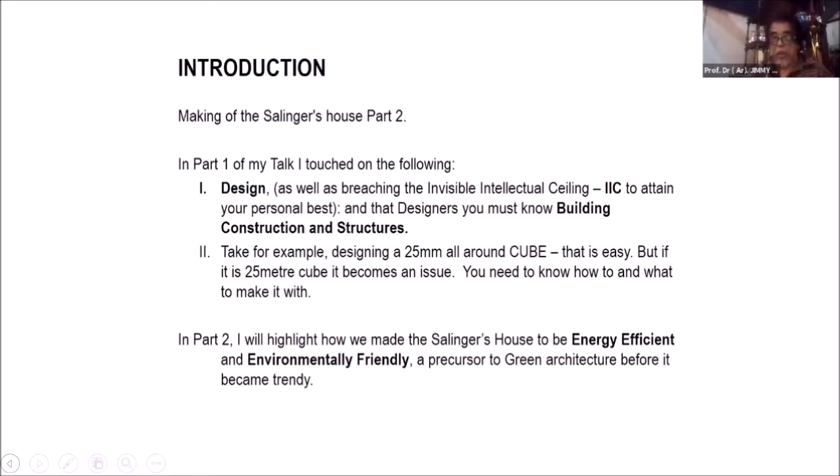Energy efficient and environmentally friendly were not the norm back in the 1990s. In fact, it was the precursor to green architecture. And green architecture was at that time not trendy or in vogue.

Now, this is important because the jury in selecting the Salinger's house commented that it was an example of excellent architecture, which is contemporary, yet not alienated from its specific cultural context. So, in other words, whatever that we design has to be relevant, contemporary, but yet specifically related to our cultural context. And that is something we must not lose sight of.

In today's world, too many of our designers are Googling ideas. And ideas that you get from the internet are not worth anything. That's my opinion. Okay? Then the other thing which the juries commented was the high technology and energy depleting services need not play an issue if we are able to be creative and employ vernacular architecture to create something that's suitable for our contemporary lifestyle. So we take these two comments by the jury to be very, very important.

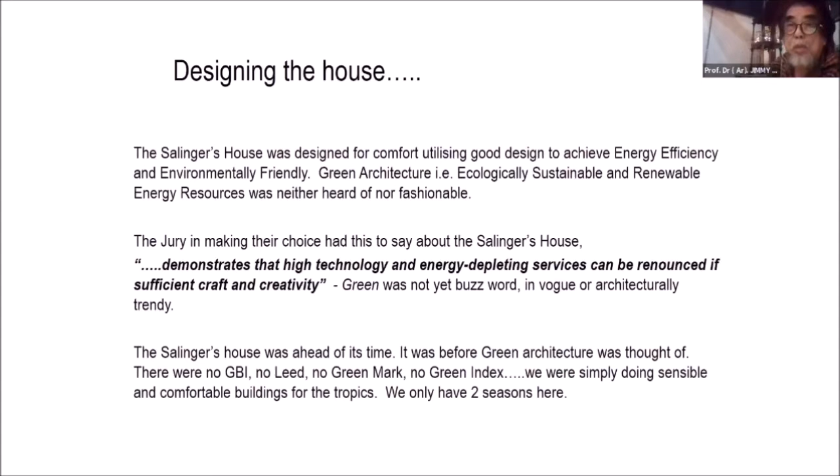What baffles me, this green building index, GBI, you have to use all sorts of expensive M&E equipment before you get points. And it's only when you've got all these points that they give you a gold award or platinum award and all that. It's rubbish. Let's not be conned. GBI, as far as I'm concerned, is another way of imperial recolonization. Okay, thank you.

Now, when we talk about energy efficiency and environmental friendly, what are we talking about? We are talking about looking at a lot of things. The site is the first thing that you have to look at. And what do you do when you go to the site? You've got to look at the vegetation. You've got to look at the land formation. You look at the lay of the site. You look at the fall. Look at the surface drainage. Telltale signs of where water falls, flows.

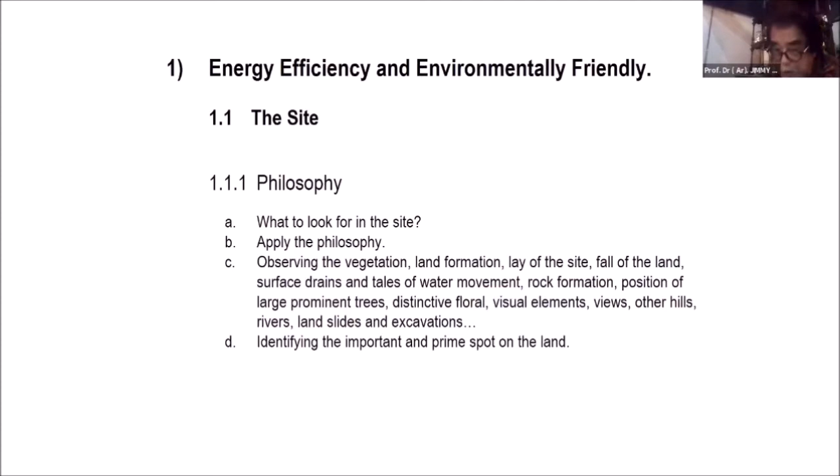After a big rain, you look at the rock formation, positions of large prominent trees, distinctive flora, visual elements, views, hills, rivers, any land failures, landslides, or excavation. These are the sort of things you've got to look at. And once you have identified the land, you then select the best location to site your house. And from that position, you've got to understand the orientation, where the north is, where the views are, where the prevailing winds are. Now, these are the sort of elements that you need to look at in order to create energy efficient design.

So the way it flows, water disperses. That's very important. That's why if you do not touch the land, you'll never get any flooding. But a lot of engineers and architects, first thing they do, cut the hill, fill in the valley. Once you do that, you've stuffed your whole environment. And you're going to give yourself a lot of trouble, and your project costs would go up. Totally non-sustainable.

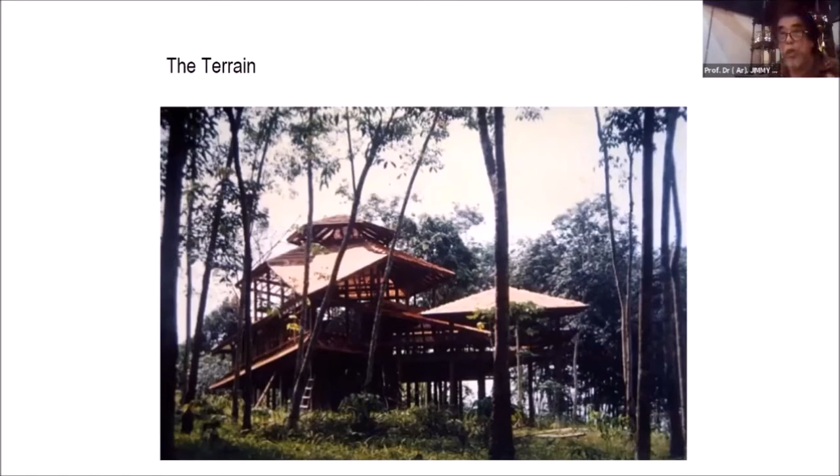Then we look at other things that contribute to the environmental friendliness. The selection of the material you're going to use for your building. The placement of your building on site. The orientation, the aspects. What are the trees you want to preserve? What are the trees you need to remove? And most important, what type of construction technique you're going to use to minimize the environmental impact on nature.

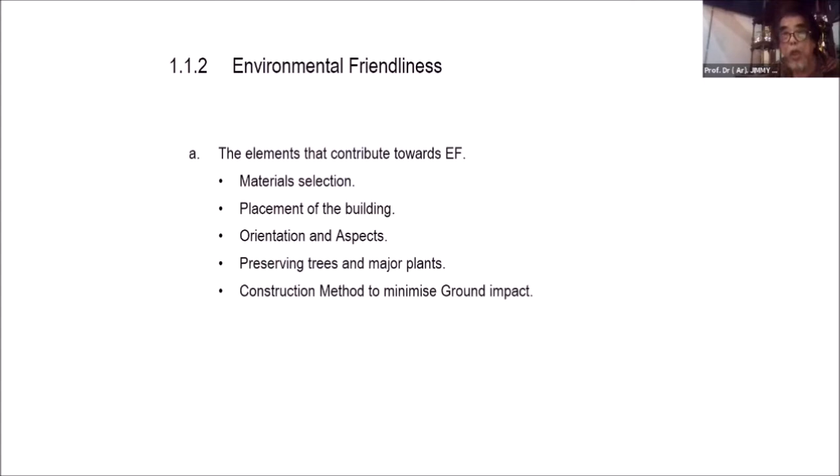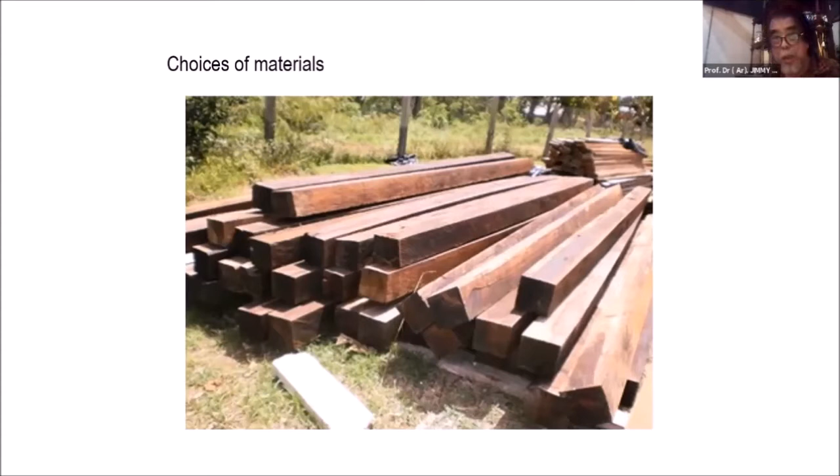Many designers, many architects, many engineers are totally oblivious and insensitive to the environment. You know, you've got to look after the environment, and the environment will look after you. Remember that. So we use timber. We get the sizes of the timber that are closest to the sizes that we need. And there's no wastage.

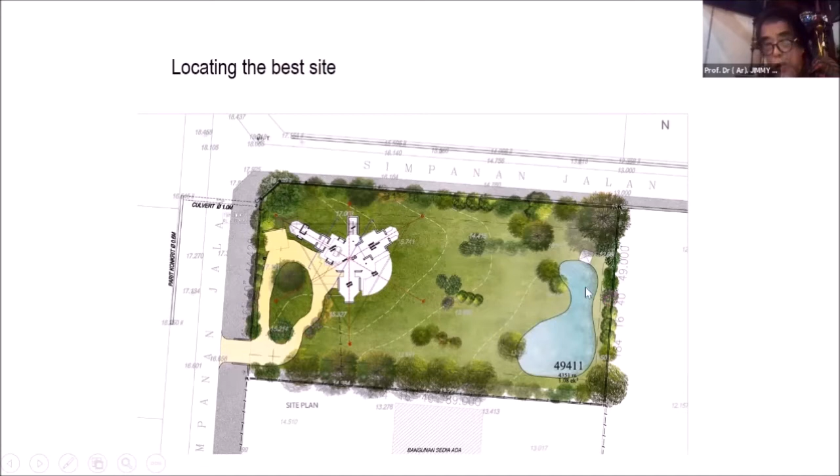And here you can see the tree. See, the tree is here, and that's where the house is sitting on the high land, and the land is falling away, right down to the bottom, where we had created a pond so that it can catch all the rainwater, surface water that will fall off, and it provides something pretty.

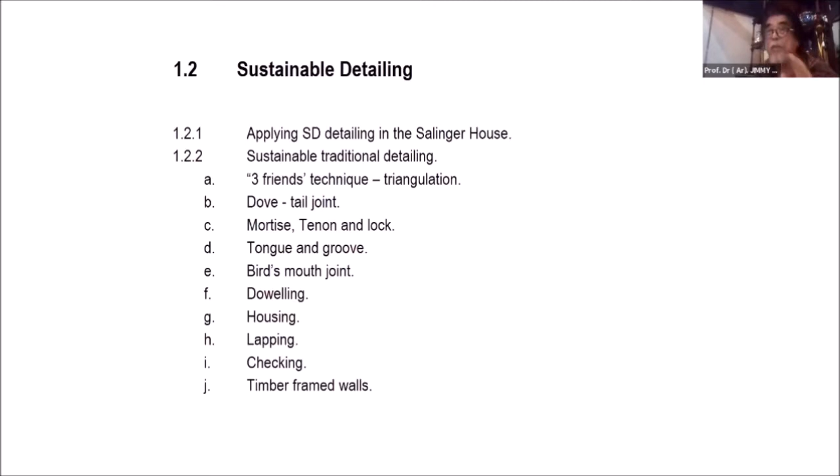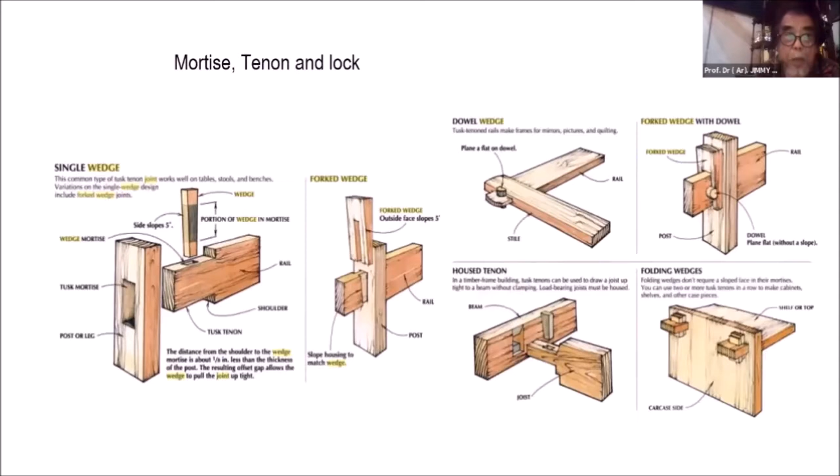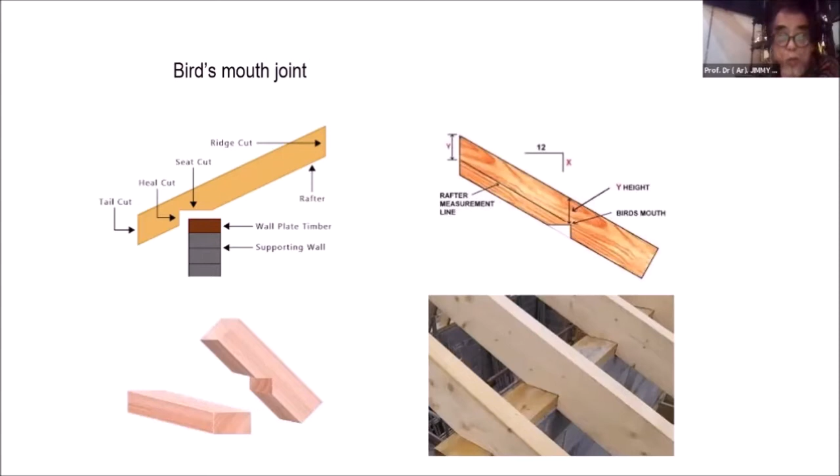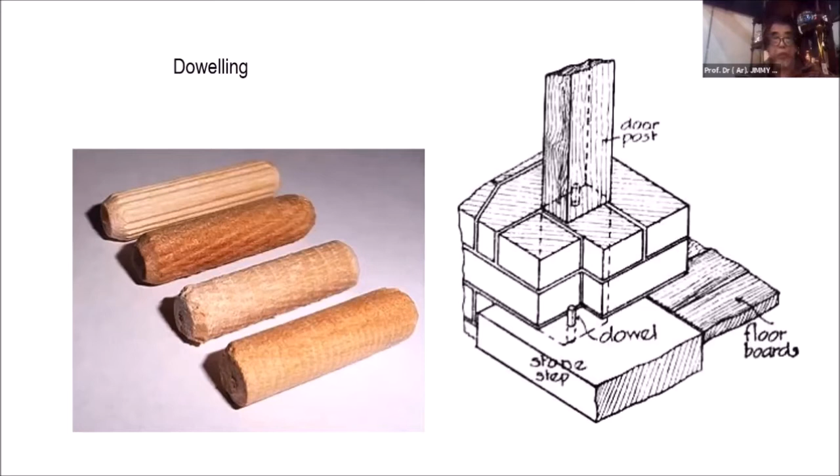Bird's mouth joint for the rafters and for the ridge of the roof, so that the roof would not get blown away. Doweling. At the base of every column, every vertical component of a building, you must have a dowel. The dowel is to stop the thing from moving. Housing is when you put a piece of wood into another piece to provide stability, and that's very important, so that your building does not become wonky.

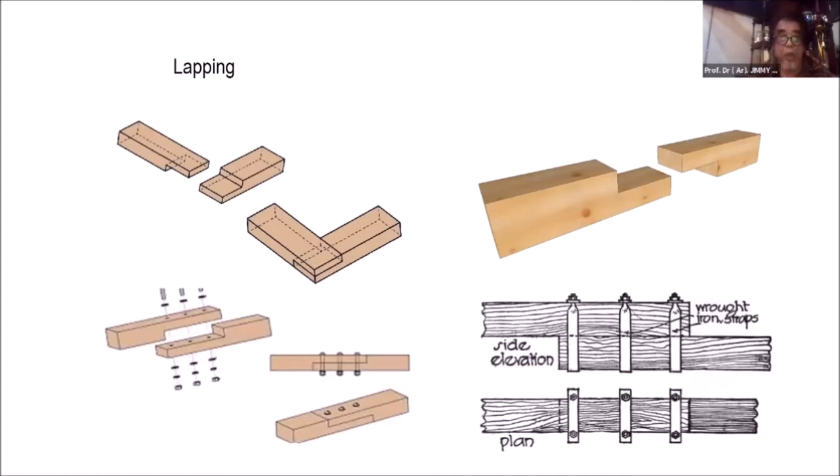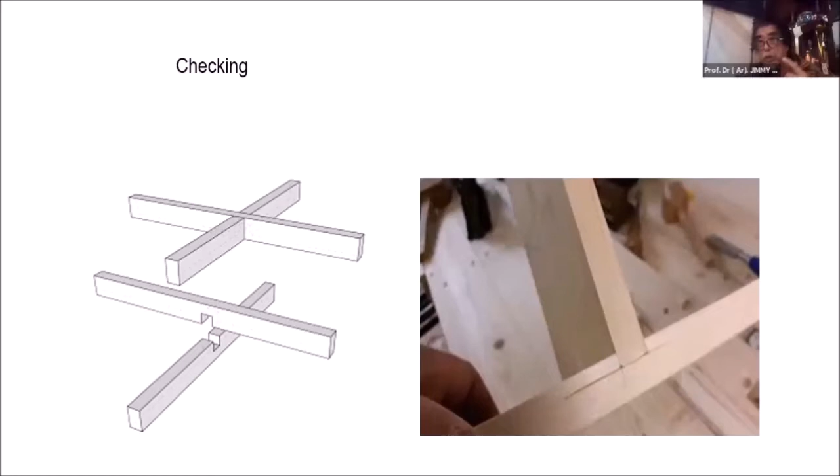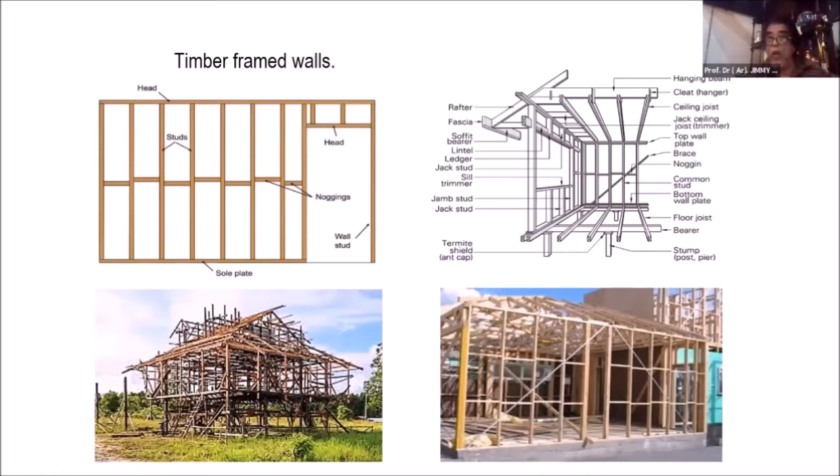Lapping. Sometimes timber is a bit short and you need to extend it a little bit, so you need to lap. In overlapping, you've got to ensure the continuity of its strength. Then you talk about checking. When you do a timber frame wall, all your junctions of timber must be checked into the other piece of wood. So this is the timber framing that shows you the noggings, the studs, bracing, the lintels, ceiling joists, ceiling hangers, the floor joists, floor bearers, and so forth.

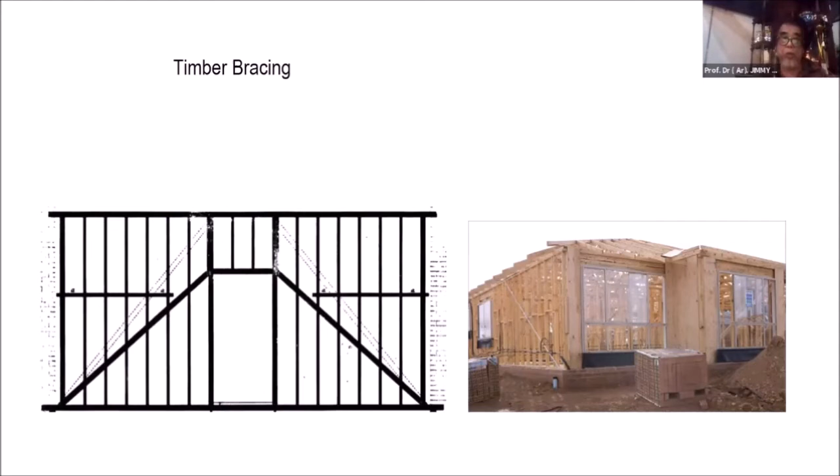Then the important one, very, very important aspect in creating stability is you must have bracings. Without bracing, your wall will collapse, and that's very important. Now, to provide comfort in the tropics is to keep the sun out and to have a lot of openings for wind to come through.

Now, in keeping the sun out, you have large roofs, and that also keeps the rain out. But then you need the walls so that when it rains, you don't get wet. But then when it stops raining, it gets hot, and you don't want the walls. So how do you overcome it?

So there are lots of things we have to look at in terms of overhanging eaves, sun shading, having lots of ventilation through floor, slats, timber seats, soffits, walls at low level, high level. You have high ceilings to induce convection air movement and cross ventilation, placements of walls and openings in strategic positions to induce air movement, the venturi movement of air and so forth.

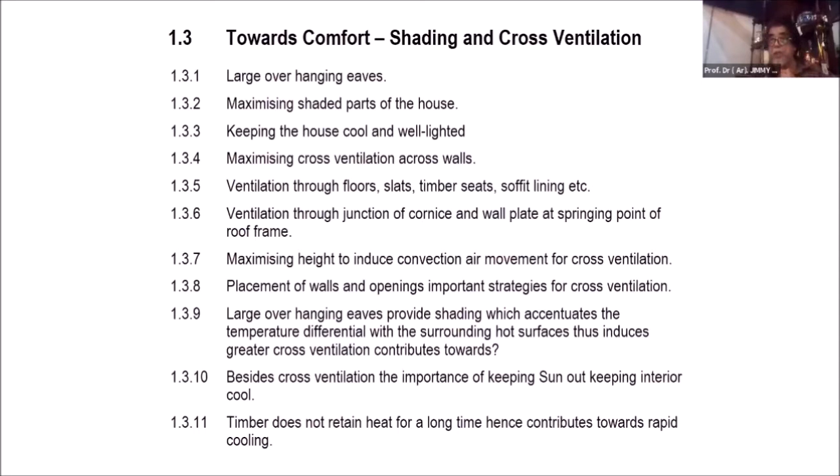But the most important thing is to keep the sun out, keep the walls cool. When the walls do not get sunlight, the interior does not get any heat. The reason why we use timber is because timber is a good material. It absorbs heat and it also loses heat very fast. So you don't have to worry about timber being hot in the evening.

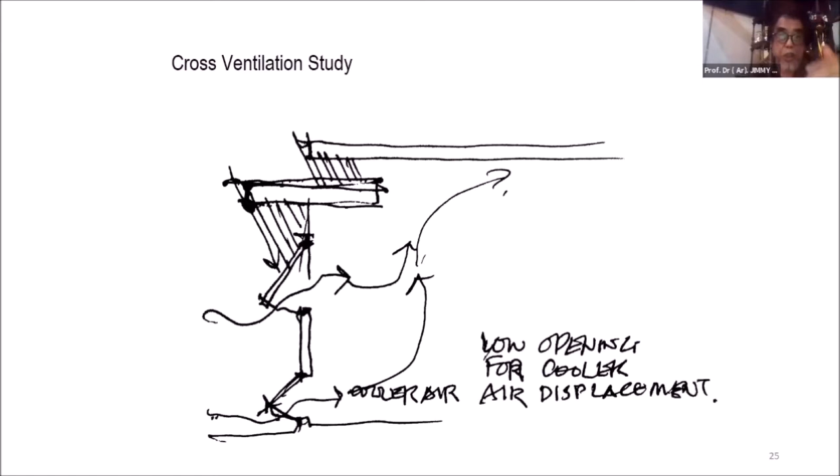And also where the rafters are sitting on the wall plate, there are gaps in between. These gaps are very important because they allow cool air from the outside to come in, and they push the hot air that's formed underneath the roof tiles away. And the same thing here, you see.

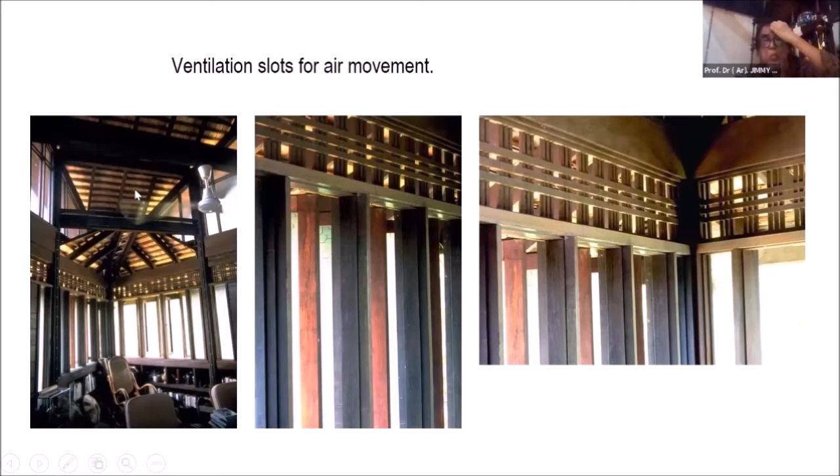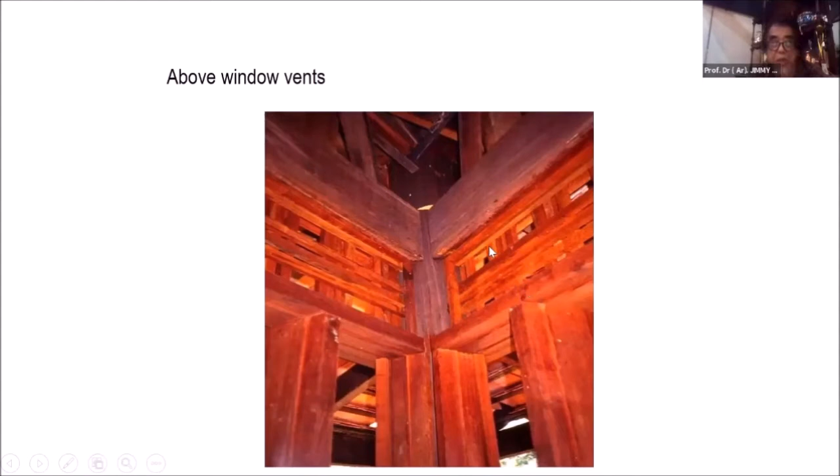So these are the sort of things: the more apertures you can have in your building, the cooler your building will become. Look at all this opening. And these are slats, timber slats that are used all the time. If you maximize your shading, look at it, it's all shaded in shadows. Look underneath the shadows.

And the seats are all slatted so that hot air may not build up and allows cool air to go through. Here you see in detail all the slots and so forth. And providing slats like this and slots allows water to drain off very fast.

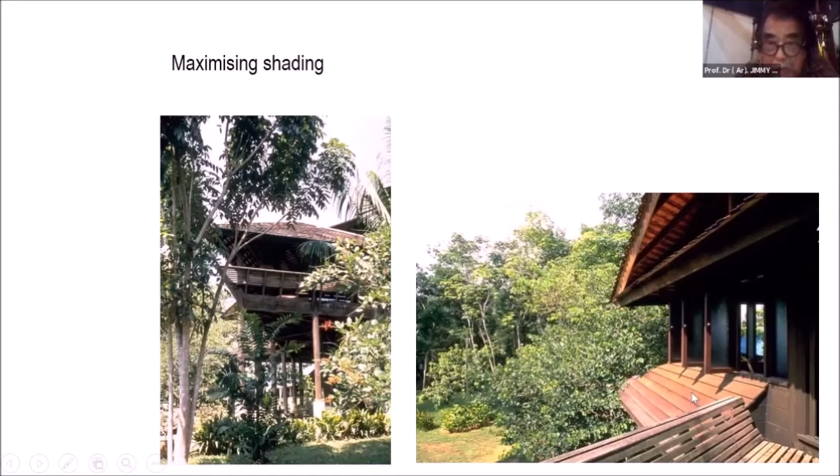Oh, what happened? So there you are.

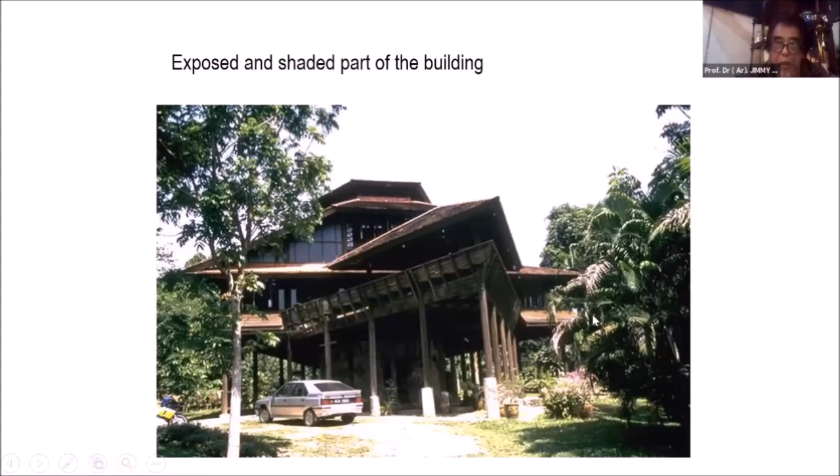There are lots of shaded spaces and what have you underneath the building and so on. And where the lighted areas are, that's where it gets hot. So you get the hot and the cool, and that helps ventilation.

Now, the other very important thing: we have talked about construction. Next thing is your structural system. You see, a building must have a proper structural system, just as a person has a skeletal frame. So in this case, the structural system is the triangulated grid system. The triangular grid came around because of the client's requirements.

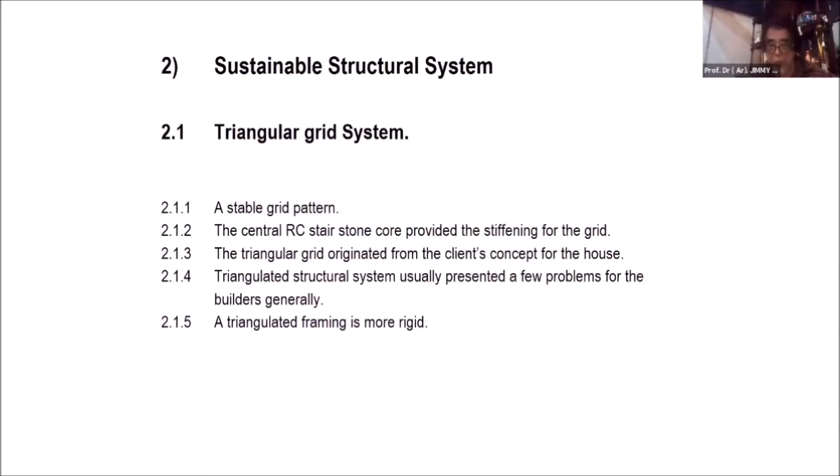In last week's lecture, I explained the concept of how the two triangles came about. So we use the triangle as a base for deriving the grid system. And a triangulated frame is always very, very stable. However, it may be a little bit difficult for some builders to build.

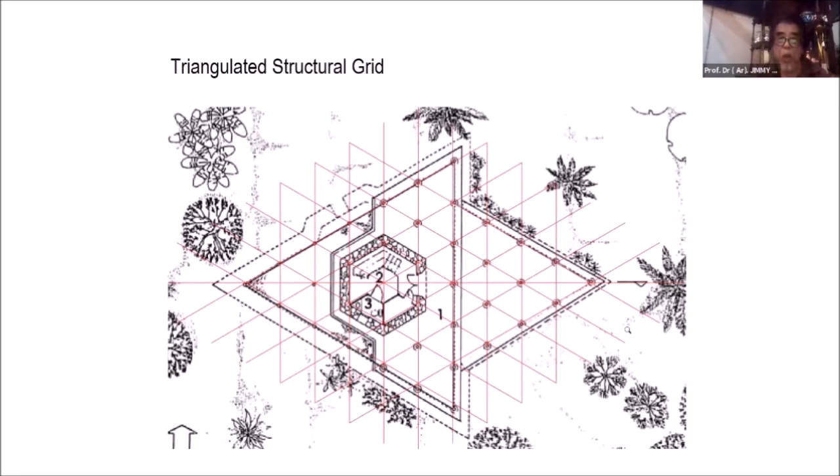Now, in timber construction, the next most important thing is the framing. The different systems of the post and beam framing. You've got the timber frame walls. You have the roof framing, floor framing. The word framing describes putting together different components. You frame them, and that's what it is.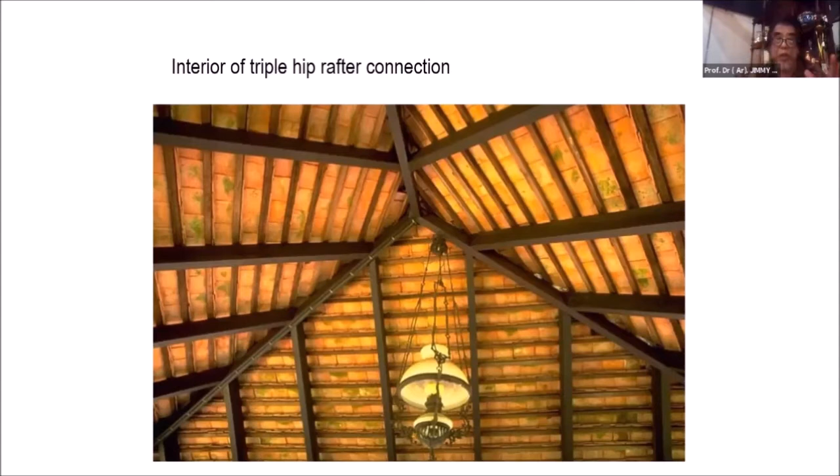You see, these are the main hip rafters of the roof, triangular shape, and these are the rafters that come in. See, the way they are laid, they are neatly laid so that the whole thing looks pretty. It looks like it's part of a leaf.

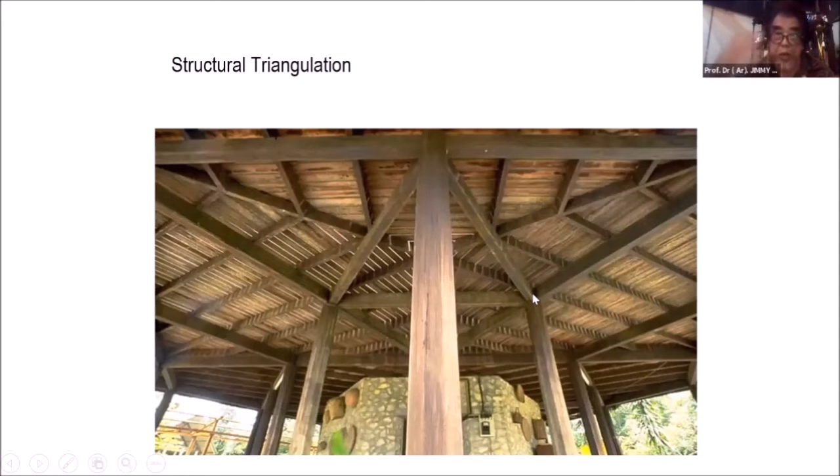And because it has a pattern, this junction was created using the traditional craftsmen's jointing, using a dovetail locking device. And by providing this type of detailing, what happened here? It allows dismantling because everything is locked into place like Meccano.

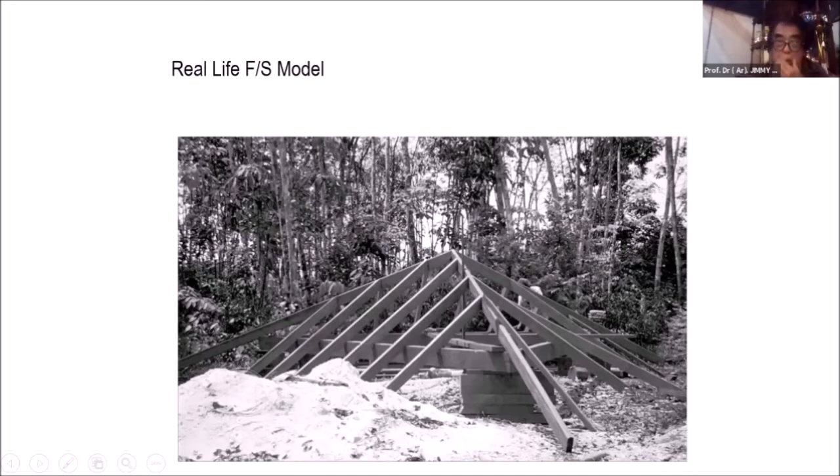See, that's a framing of a roof. This is a full-scale real-life model they make at the site. They test everything. They make sure that this connection works and all this other works, and that the bird's mouth here works. Then after they know that it works, they produce the real thing and they put it up.

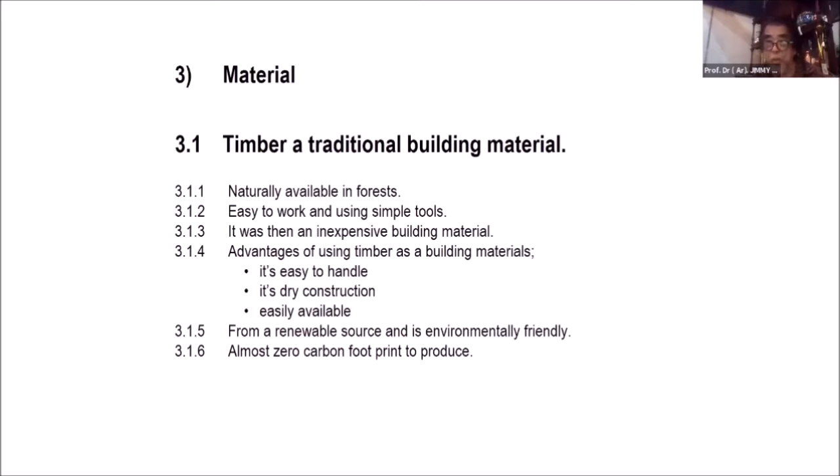Now, timber is a fascinating material. We have them in our forests, lots of them. And you can work with it easily. It's a dry material, it's easy to handle, and you can use very simple tools. So in those days, the type of timber we used was very inexpensive, I think something like about 150 to 180 ringgit a ton. Now that's very good. And the marvelous thing in terms of environmental friendliness and energy conservation, it's almost zero carbon footprint for timber to be produced.

It's important that when we do something like this project, the carpenter, which in this case is Adam, he went into the forest to look for trees to cut himself. And he only selected trees that are not too big so that there's no wastage. And that's very important.

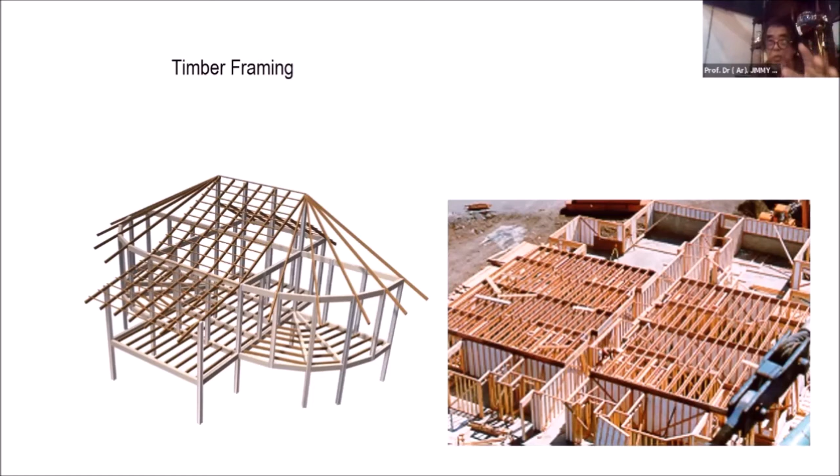Now, the trees were all ecologically harvested, as I explained. He personally selected them. He cut them. They are from the forest near where he lived in Kelantan, near the Siamese border. And these trees were all cut, dressed, transported down to the site in KL, and then left there to be air dried.

Now, none of our wood was kiln dried. Kiln drying wood for the tropics is wasteful because the average working moisture content of wood in our place is about 20%. Now, when you kiln dry timber, the kiln brings the moisture content down to around 8% because all these machines were designed for the temperate climate, and they do only temperate wood, softwood, and their moisture content is 8%.

So you kiln dry in the tropics at 8%. The moment it comes out of the kiln, within 24 hours, the 8% moisture content has risen up to 20%. So it's an exercise in futility. So what we did in this project is it was left to air dry under a shaded place. That's the best way.

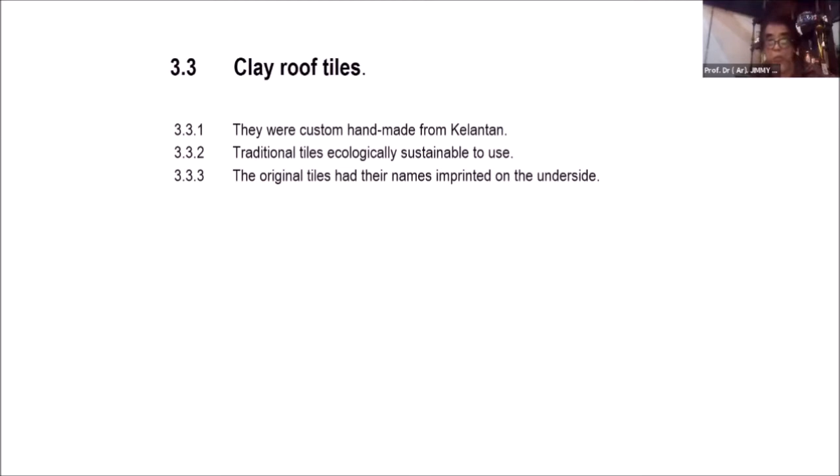You see, we need tiles that will absorb a certain amount of moisture, because when the tile has a certain amount of moisture content in it, it also acts as a repellent for rainwater. Now, these tiles were custom made for the Salingers, and it had the name in Arabic underneath somewhere.

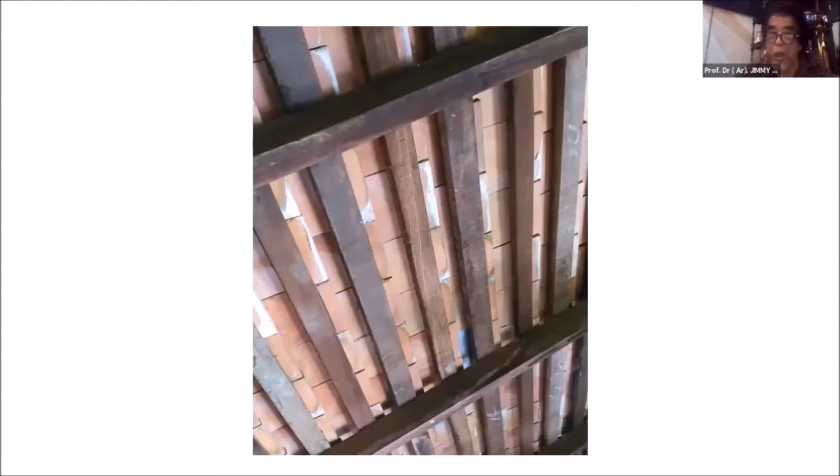This is a close view of the type of roofing. This is another close view of it. And this is the view of the underside. See, these tiles were all laid on these battens. So the tile is slid in this way with a little bend at the end of the tile so that it hooks onto here.

Now it's very clever, because if you have to replace a tile which has broken, all you need to do is remove the broken tile, you pull it out, and then you slide in a new piece.

So you see, the replacement is a very easy thing. So if this is not sustainable, ecologically friendly, and energy conservation, what is it? So all these were the sort of things that we had introduced into the Salinger's house.

Another view of the underside of the roof, no insulation, because in the tropics you do not need insulation, because when you put on your insulation, those wool, whatever you call them, fiberglass wool, it's like saying that in the tropics, to stay cool, you should put on a fur coat.

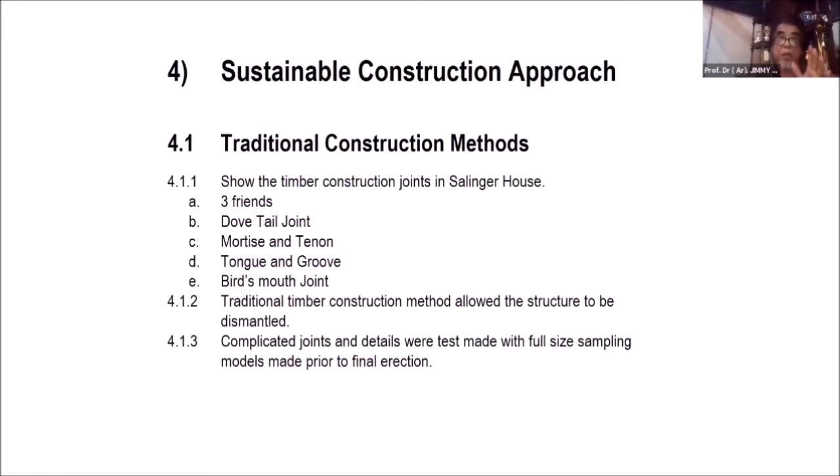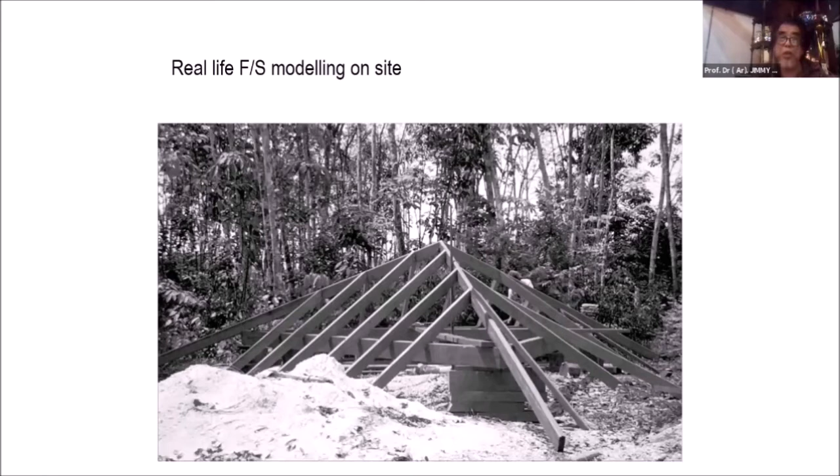Then we had an engineer who did not understand, and he said all the joints had to be done with metal gusset plates. But then when we met this contractor, Pak Adam, he said, no, we don't need to use steel. They will use the traditional method of cutting and so forth, because in that way it allows the building to be dismantled.

So when he was shown the picture of the plan, the triangular plan, the friend who showed it to him said, hey, this is not the usual Malay house. So what are you going to do? He looked at it. After a while, he said, well, if they can draw it, I can build it. Now, that's gumption for you. He's a never say die guy, and I like that attitude. He's unfazed by challenges, the spirit of determination. He's cool.

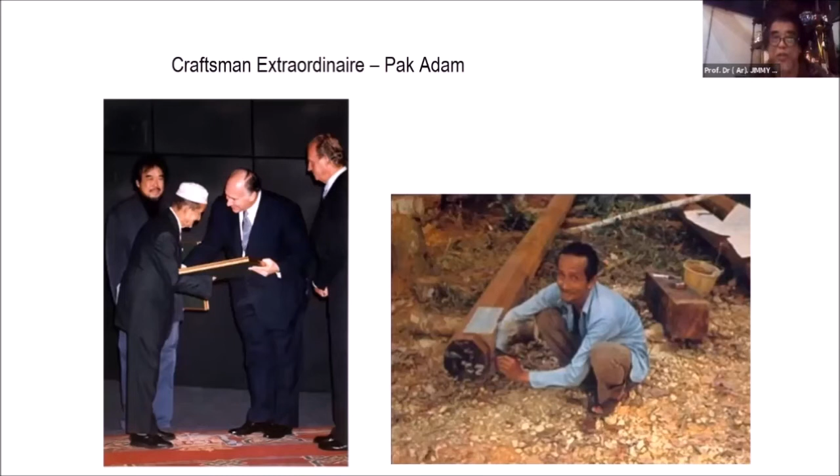And from his part of the prize money, I was told he came back with that money, bought little gold pendants and gave them to all his grandchildren. So every one of them got a little thing to remember their grandfather, this great man's achievement. Wonderful.

Now, when Pak Adam provided the alternative method of jointing the wood, we jumped at it. So he was able to do all this because it allowed for dismantling. And this guy, he is a carpenter, he's a rice planter, and he's also a farmer. So he has a cyclic life of 3 different activities.

And I think he juggles it so that he doesn't work like what we do, 9 to 5 on one job. His one day could be over 3 jobs. This is not unlike some of the Indian farmers I met many years ago when I went to Kerala.

They have this little 1 acre plot of land. He's a farmer because he plants a lot of vegetables, fruits, and what have you. Then he has a cow.

When he gets up in the morning, he works as a farmer. He tends his farm, then gets all the produce of vegetables, fruits, or whatever it is. He takes it down to the market in Kuala. He sells it, and at about 10 o'clock he finishes in the market.

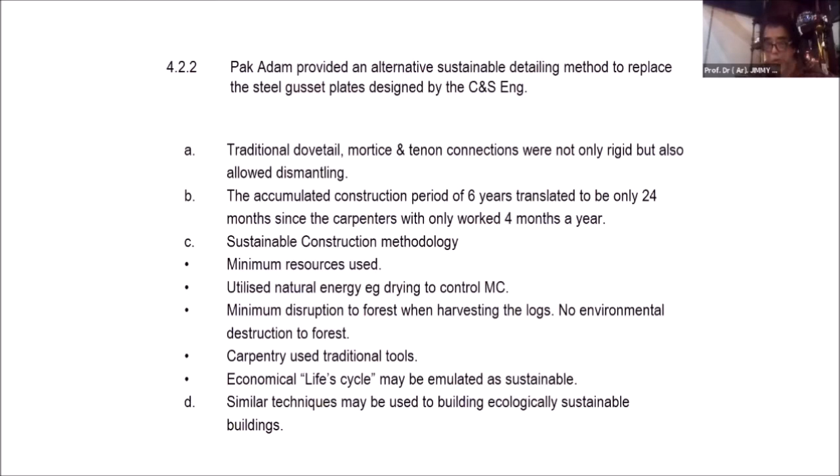Now, having done this project and seen how it was done at close quarters, I think if we have more people like the carpenter Pak Adam, similar techniques may be used for the construction of a lot of buildings. And the tools they use are very simple.

I managed to get a couple of pictures of what the traditional hand saw looked like—very simple. Then they have wood planers, hammers, drills for drilling holes, plumb tools, all sorts of things. Chisels and axes for cutting wood and shaping big wood. It's all there—simple, straight hand tools.

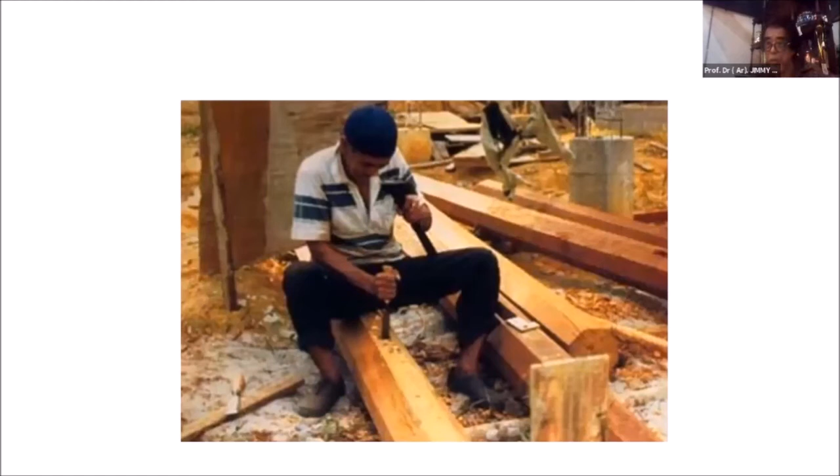You look at this man—he's using a chisel, he's got a chisel here, right? But then he's using the side of an axe as a hammer. So he doesn't really use a hammer per se, but uses the side of the axe.

So these are some of the joints that they craft up. They make it look so effortless—the chiseling and so forth. So they are able to create a lot of joints.

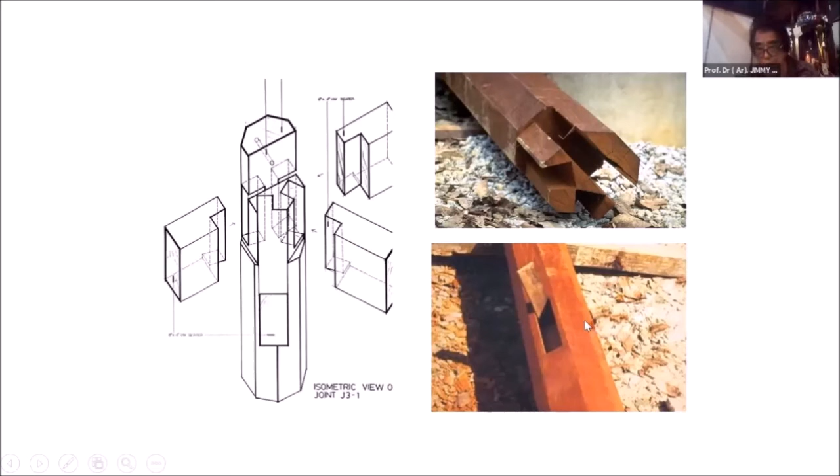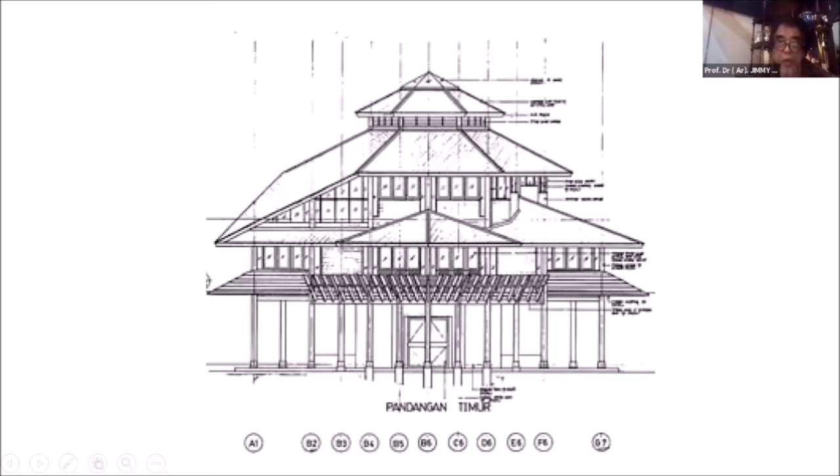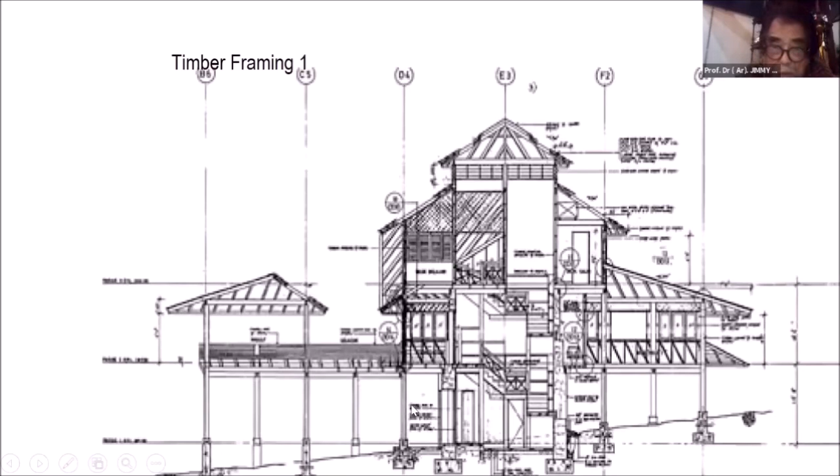Here is a section which illustrates how the framing works—the framing for the roof, the framing for the floor, the framing for the walls, the framing for the seats and so forth. It's all there. So every one of these frames, every junction, has to be worked out. There's no two ways about it.

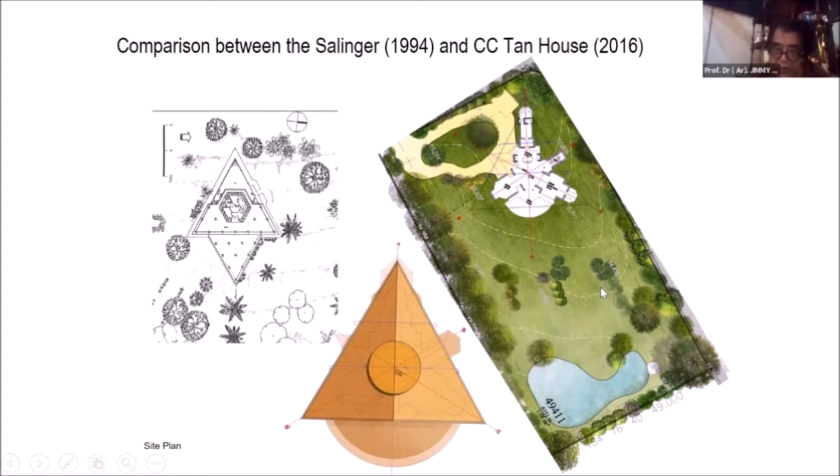This is what the plan looked like in the end. You see the plan is triangulated, three-sided, a three-pointed star, whilst the Salinger's house was two triangles over each other. But the roof plan of the Tan's house is like this, so you can see a slight difference. The structural system is almost the same, triangulated - here is all the wooden triangulation.

It's a steel triangulation. For this house, we used steel and concrete instead of timber because we wanted to explore ideas and see how we could bring it forward to a greater plane.

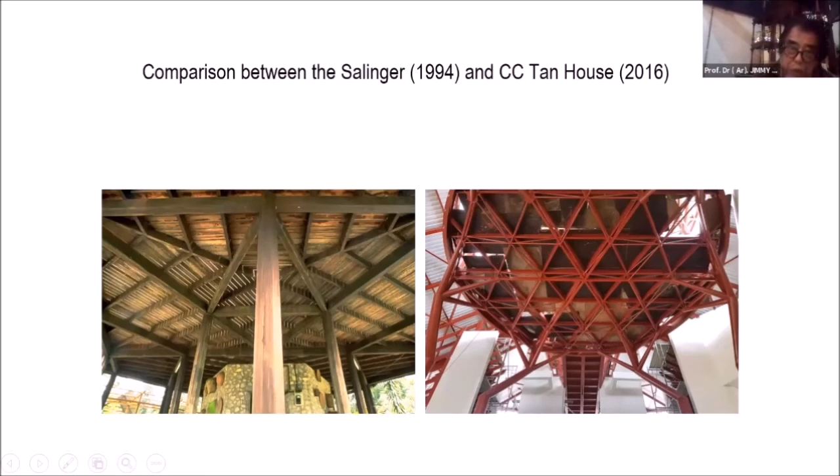Now let me just go back and show you what this house was like - you saw it earlier, but you probably forgot it. Let me revert my slides. Yeah, this is a house. So this is, as a matter of curiosity, triangular. It's got lots of similarity - at least there's a lot of similar DNA in the selection of the material and in the selection of the structural system for this place, because the requirements were almost identical.

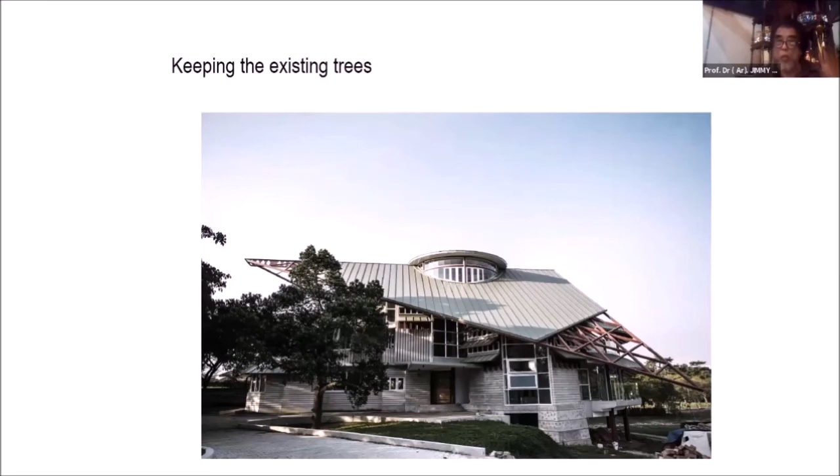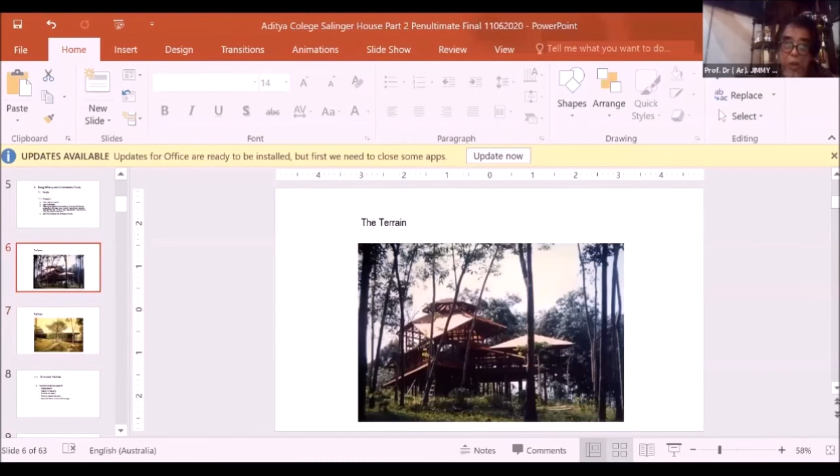So with that, I end my presentation today. I hope it's been of help to you. Thank you very much.